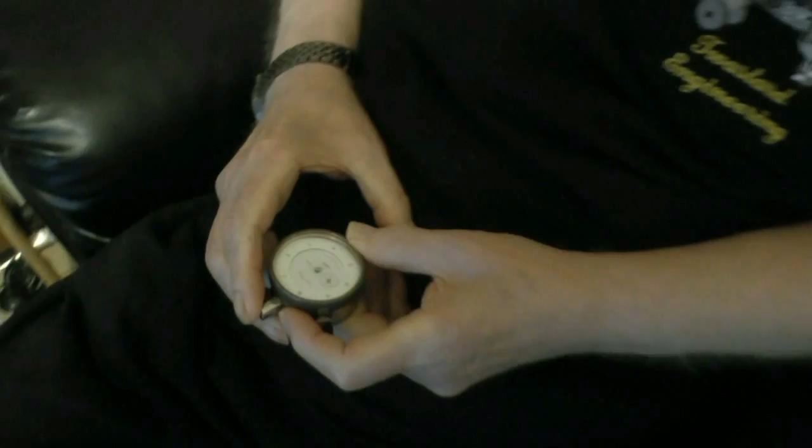Hi, my name is Ed. I'm John's dad. Welcome to this week's draw. This week's draw is for the dial test indicator. Quite sensitive, isn't it? And this week's winner is... and the name is... St. Paul O'Sullivan.

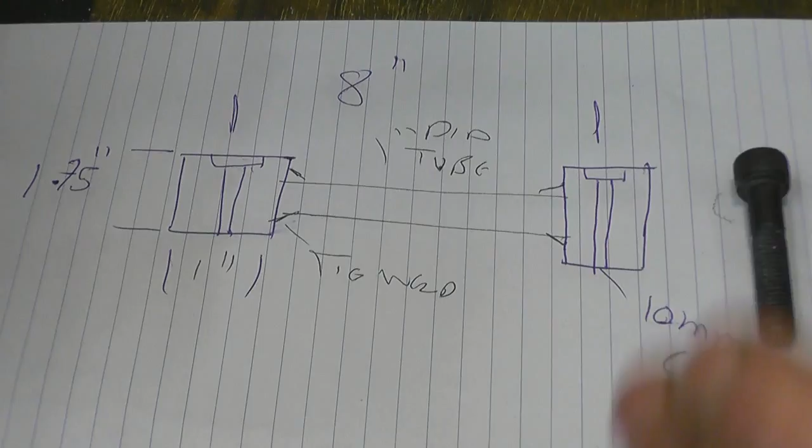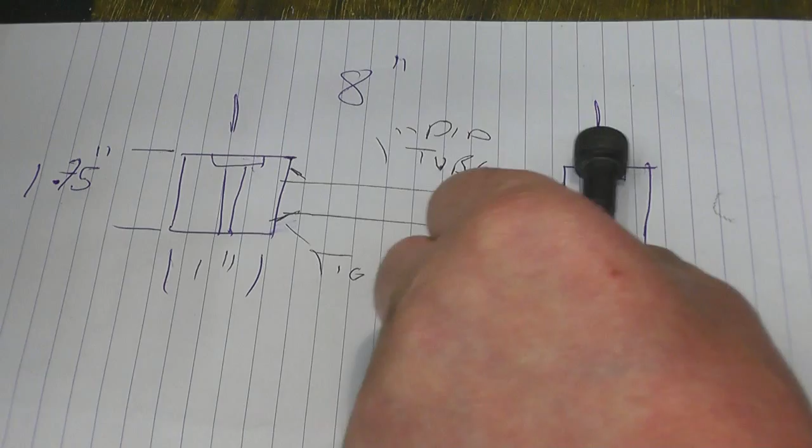I've got a nice little straightforward machining job, well, fabricating job to do for a lad, which will make a nice change from cutting tape, making horrible big threads. All it is, it's a steady bar for a motorcycle engine. Basically 2 bosses of steel, which are inch diameter, 1.75 long, and I drill and counterbore to take an Allen bolt, a 10mm Allen bolt, piece of 1 inch diameter tube, welded in between them. The important dimension is the centres there, 8 inches between centres, and they must be square to each other, and they must be in line with each other.

I've got some suitable bar. I'll make the 2 bosses first, and then we'll have to find a way. I think I know how I'm going to notch the end of the tube to make it a good fit around the bosses on the end.

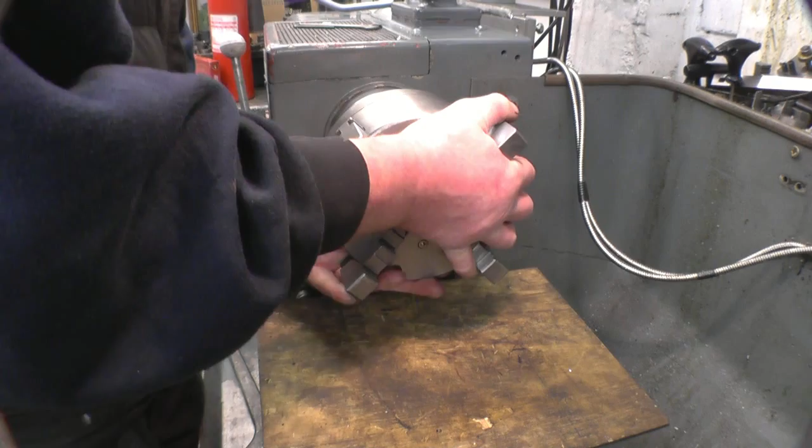I've been very happy with this 4-jaw self-centering chuck. I'll just take the jaws out and put the ordinary ones back into it.

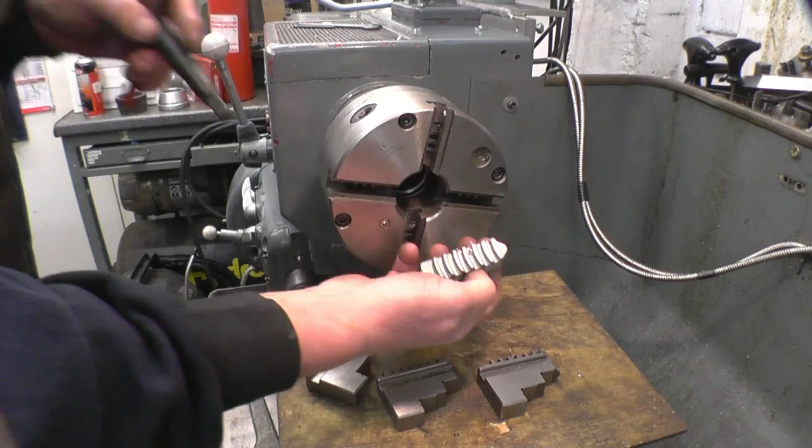Full of aluminium off the last job I did. See how the aluminium gets stuck in the teeth on the jaws.

The jaws are numbered, so this is which hole I go into, obviously 1 to 4. As long as they all meet in the middle, we'll be looking pretty good to go, which we are. Excellent.

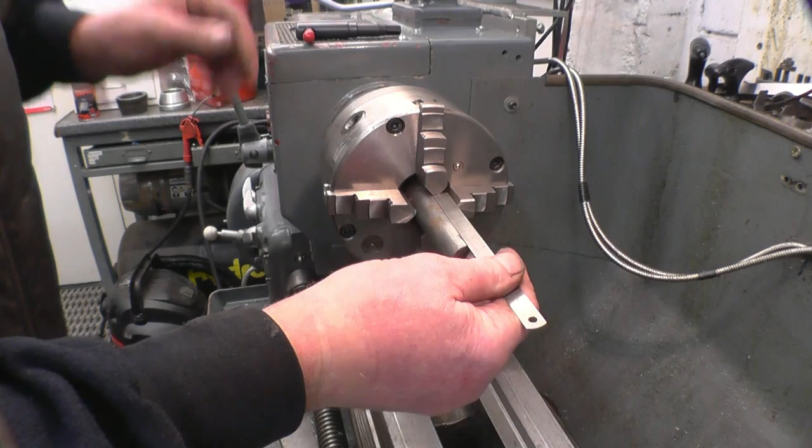Each piece is 1.75, which means I need 3.5, 4 inches to play with. 4 inches to play with, really. Right.

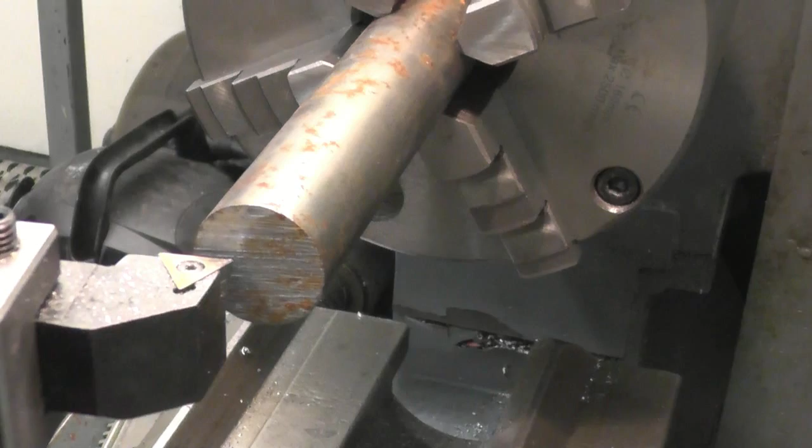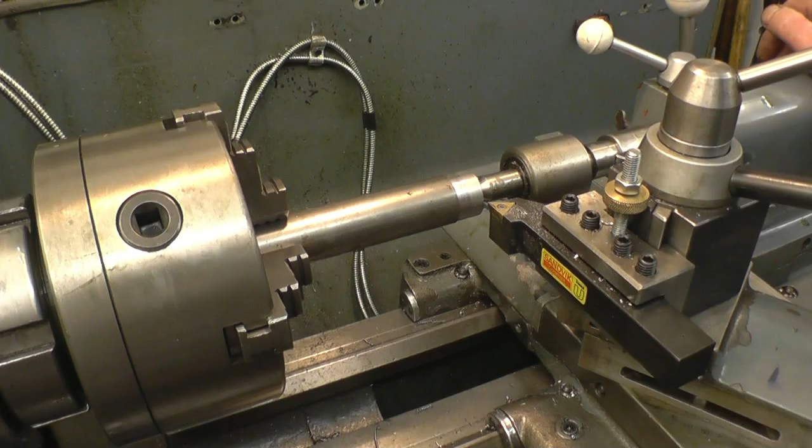Right, we want this down to 375 thou of an inch. Just take a rough cut first just to get some material off.

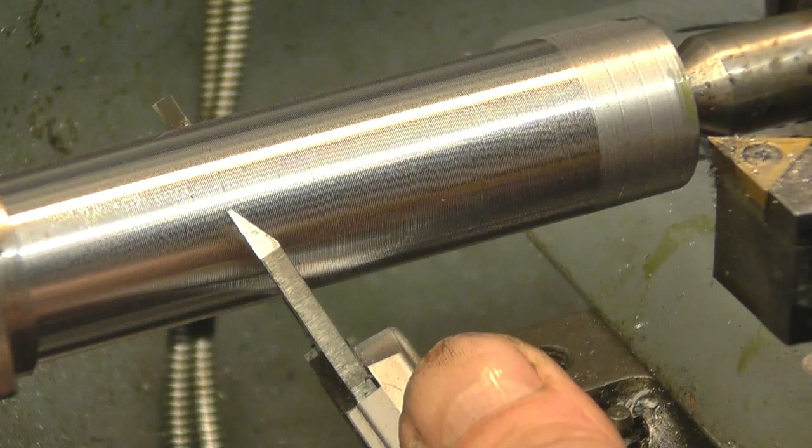Right, I'll speed things up a little bit.

The next thing is to drill out a clearance hole for the bolts. This is 10mm, so that's the clearance drill.

I'm sure you drilled that deep enough. Perhaps you didn't. You didn't, because you're a turnip head.

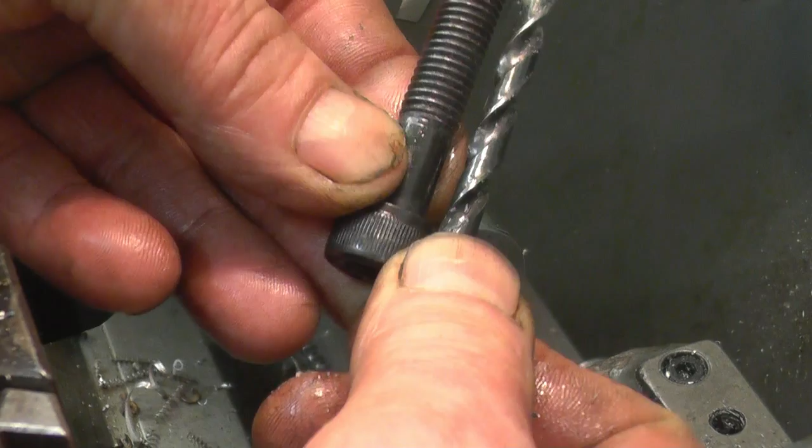With the aid of the pause button on the camera, I brought that a little bit deeper. I've also faced that off, so the cap head is level with the top of the bush.

I'll put a chamfer on this side, part it off to length, and then do the other one.

I just need to make sure the parting tool is square to the job. I know it's on centre height, so if I do that, it's touching there, lock the tool post up, it's got to be at 90 degrees to the job.

Maybe 1 inch and 3/4. Inch and 3/4 there. I'll just lock the carriage off before we part it off.

Part this off at a reasonably quick speed, trying to keep a constant feed on it. You haven't got to back off when you're parting, keep it going.

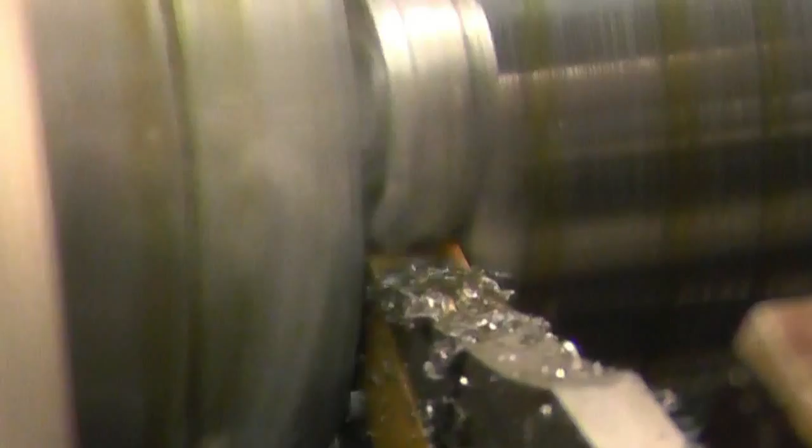Wants to speed up a little bit as it gets in towards the centre, but we're nearly there. That one.

Right, so same again, I'll drill this a bit deeper, counter bore it, chamfer it, part it off, and then we're ready to do the tubes.

Right, I've got the two bosses made. That's the material you supply, quite heavy walled steel tube. That needs to be welded onto there, and the other end welded onto there, and they must be 8 inches apart, and it also must be in line. They cannot be pissed like that, they've got to be nicely in line.

You're a very good actor for that. Would you want it again like a Bogart or like? Aye, I do like Bogart. Hi, my name is Ed, I'm John's dad. That's better, aye, with emphasis.